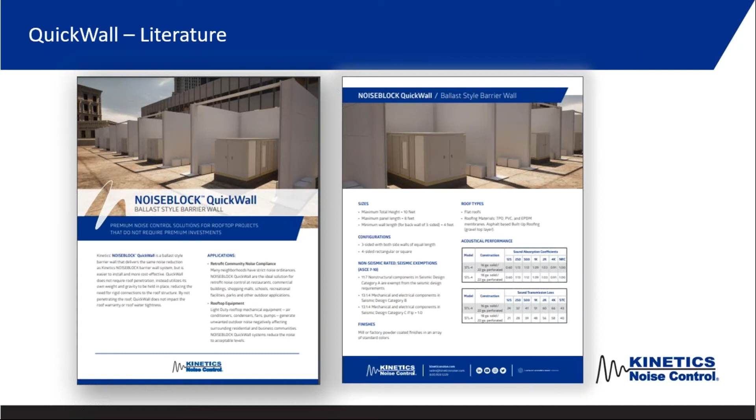Now that we're in the mood to talk about this product, to let you know before we get started as well, there is a data sheet, a flyer front and back on this product. So everything we cover in this presentation is going to be covered or reflected on this data sheet. Whether it's the application, the features and benefits, dealing with the sizes, different configurations, seismic, finishes, rooftop types, and acoustic performance. It's all here. So we'll cover it in the presentation, but also you can download this from our website.

So these are some screenshots from the video, some renderings of a project that we have planned to do. And you'll see there's a number of three-sided noise block barrier wall systems around some rooftop equipment, air handlers, light duty equipment. And there's some windows in the back here in an office building. So they're worried about the noise projecting from these units to that office building.

Now, we can do both three-sided systems or four-sided barrier wall systems. We're showing a three-sided here just so you can see what's going on inside, okay? We open up this wall here so you can see what's going on. So it is available in four-walled systems or three-walled systems.

You'll see here the common components of a noise block barrier wall system. You have your base plate plus column welded assembly. You have your 4-inch thick noise block wall panels, usually perforated inner shell for sound absorption and solid outer shell for sound blocking. So you get that composite noise reduction offered by the absorption and sound blocking. The only thing different here is you're going to see something low at the bottom, these little boxes. And that's where we talk about the ballast of a system.

So just looking at the QuickWall ballast, well, what is a ballast? A ballast is basically a heavy material placed low on a subject matter to improve its stability. And that's what we're doing here. As we said, you have your noise block panels, your structural steel. This is an example of a three-sided system, of course. And then you have your ballasts down here, which are basically weights.

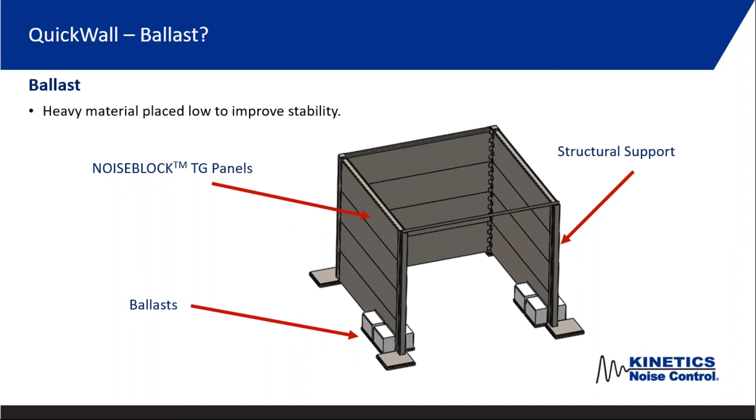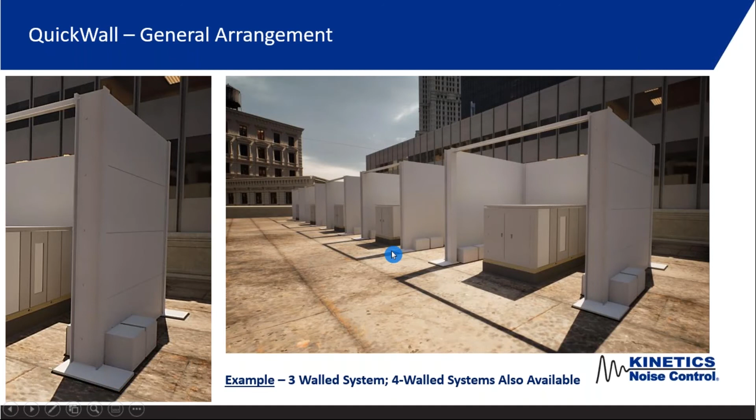We're going to determine how much forces are there, how we have to overcome those forces, how many weights we need, and what is really feasible to be taken up, because this is also going to be weight on the roof. But the key here is, going to the previous slide, is that if you look here, there's no anchor bolts. So this is not rigidly attached to the roof structure. And that's the key here and what's going to reduce the costs.

When I talk about applications for this product, this QuickWall product, I put in the right corner here, retrofit and new construction. The initial benefit is in retrofit applications, where there is equipment up on a roof. There's no problem, it's new construction. A year later, maybe somebody moves in next door and now there's a noise issue at the property line and we have to quiet this down. So just keep that in your mind from a retrofit perspective.

A lot of this presentation, some of the comments, features, and benefits are going to be a function of being retrofit. Also, we can use it for new construction though. And once again, this is all for community noise compliance, rooftop systems, where it could be a restaurant, commercial buildings, schools, worship centers, anywhere where there could be an outdoor noise issue, and also for rooftop equipment, air conditioners, condensers, fans, pumps, anything making noise.

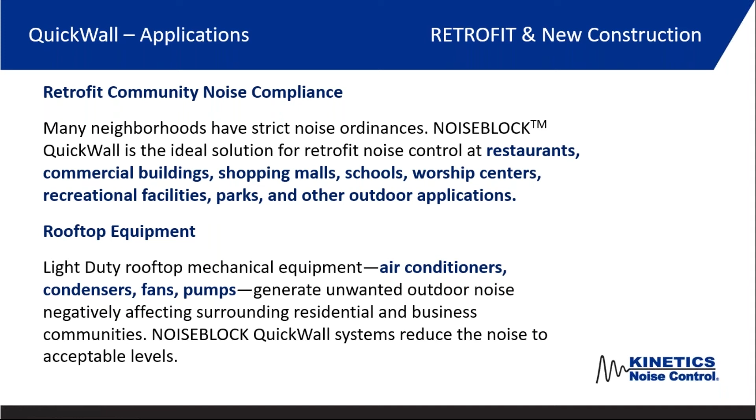So why is there... Hey John, we have a couple of questions. Oh, I'm sorry. Great. Yeah, we didn't mention about questions at the end. So let's go ahead and answer them as we go.

That's great. Okay, so the first question is, can we do one-sided or two-sided wall systems? Right now, we're doing three-sided and four-sided wall systems. We are looking at one and two-sided wall systems, and they should be able to be done. But right now, most of them have been three or four-sided. So I'd say the answer is yes, but we would want to look at the application.

Now, why is not rigidly connecting this to the roof a benefit? Well, one reason is, remember we were talking about retrofit. Maybe the equipment is already there, and we have a noise issue. We have an existing roof. We're going to eliminate the need for roof penetrations using this system. So now we don't have to worry about any water leakages in the future. We don't have to worry about having to get under the existing roof to access it if we have to rigidly tie a column into the system. So those are all very important benefits of this.

The other thing is it's not going to void a roof warranty. It's not going to interfere with the roof warranty. There's also shorter permitting processes when compared to systems rigidly attached to a roof structure. There's quicker installation. And although we want all contractors to be very busy all the time, this actually would reduce the need for multiple contractors.

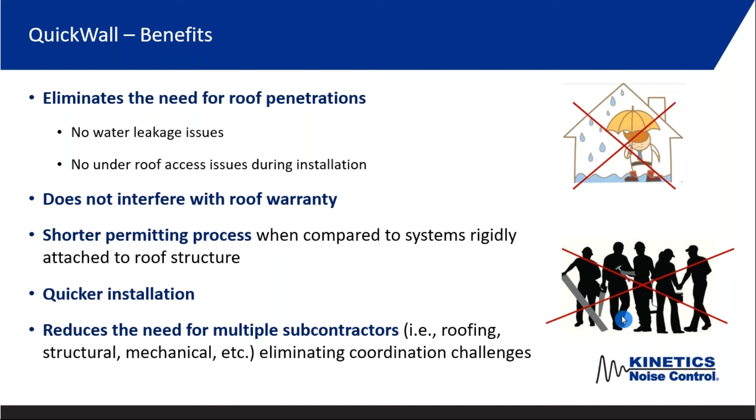If you don't have to penetrate the roof, we don't need a roofing contractor. If you don't need to rigidly tie to the existing roof structure, we don't need a structural contractor. We might only need a mechanical contractor. So now we're eliminating all these coordination challenges as well. So those are some very upfront benefits to this system, which basically floats on the roof. It's not rigidly connected.

QuickWall cost impacts. The initial cost is about the same as our standard noise block system. Our noise block system, with structural steel base plate upward, you have our panels, you may have doors, you may have acoustic louvers. There's a lot of things that can be installed in this as well. That holds true at the same price. There's a little added cost due to the price of the ballast, because we're going to have to add these counterweights, these ballasts, to the system.

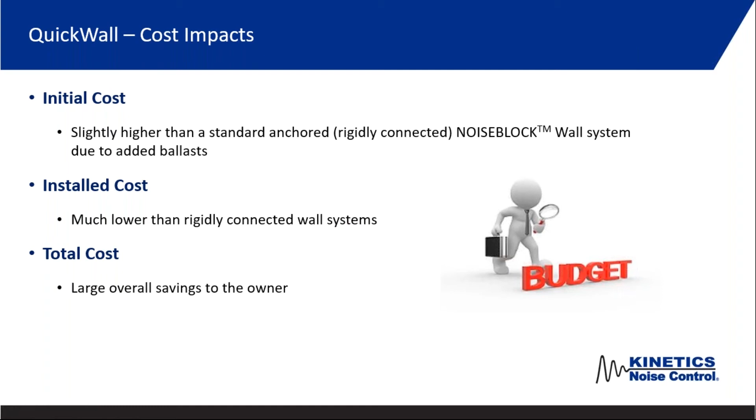So the initial cost might be slightly higher, but the installed costs are much lower than a rigidly connected system, because we don't have to penetrate the roof, we don't need multiple contractors, and we don't need to tie into the roof structure. So the total cost, when you combine the two, is a large overall savings to the owner, and that's what's really important with this.

Now, is this system applicable for all applications? The easy answer is no, not all applications, but for many it is. When we design this, there's a lot of things that are considered. We want to design it to resist any tipping due to wind and uplift forces, and the lateral movement, skidding across the roof. So we look at how many ballasts are needed, how much weight is needed to counteract those forces as they're designed into the system. The added weight also provides additional friction.

Since there's no rigid support at the base plate, we also have a pad underneath that base plate as well. That's to protect the roof, and also keep these datum points, the heights of the ballast and the bottom of the base plates, at the same elevation.

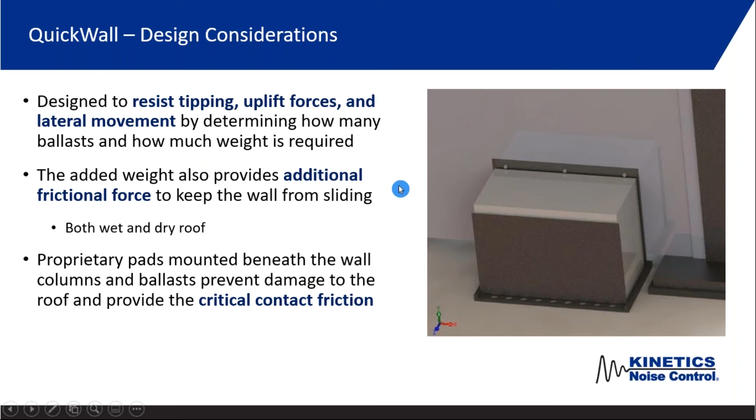But what we do is we counteract those forces. The pads are proprietary to give us a critical contact friction. And the other thing is that this is good for both wet and dry roof systems. So these are things we look at, because those are tests we have run in-house, so that we have that all taken care of.

Would Kinetics provide all the components of the system, including structural steel and engineering? Yes, and that'll be in a deliverable slide that we have at the end, but correct. Kinetics would design everything from base plate upward, including the ballasts and the proprietary friction pads, whether this is powder coated or not, all the bolts, nuts, washers to hold the panels in place to the structural steel.

So everything is connected together in one complete package, almost like an erector set. And that's the nice thing of this. There's no field welding, nothing like that. Anything else? Would the weight of these ballasts introduce the need for modification to existing roof structure to handle the additional load?

Yes, actually, you're going to find a point of diminishing return. In other words, if you have, let's say, a huge wind force, say 200-mile-per-hour gusts of wind, and we say, well, we can counterbalance anything. Well, before you know it, you get too many ballasts, too much vertical weight, dead load, and now your existing roof can't take that load anyway. So that goes back to what I had mentioned. It's not applicable for all systems, for all applications.

But in some applications where it's reasonable and we have enough ballast, there will be some building structures where you might have to add some more structure to the building itself, separate of our system, just to hold the vertical weight of this. And we'll cover that in another slide as well.

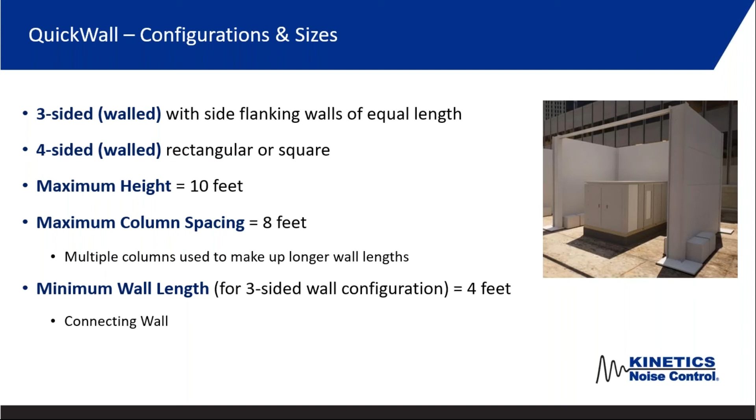And as you have an application, whether Kinetics independent reps are working with engineers, architects, or owners, this will come back into the house here at Kinetics, and our structural engineers on staff will look at this to make sure it's applicable for your application and the site conditions.

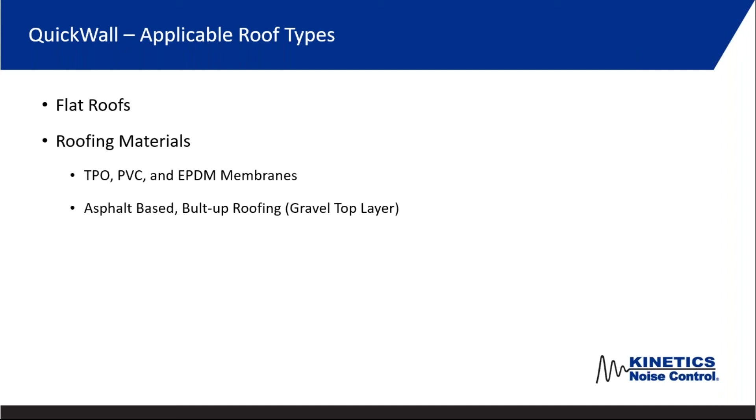Roofing material, all kinds of single membranes, whether it's TPO, PVC, EPDM membranes, no problem. And I think the biggest question that we get is, what about a built-up roof system with a gravel top layer? No problem. We have that covered as well. So this goes with the limitations. They're not necessarily limitations. I think this should be limitations and clarifications.

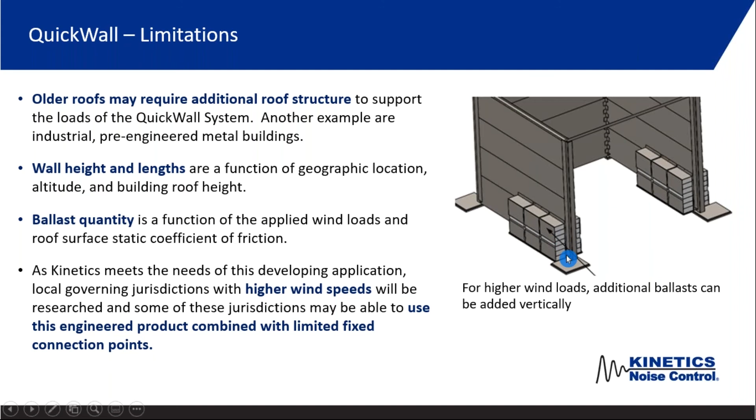They can vary in shape and size, and that's what we can do to see what is the best. How can we keep the lowest profile with these ballasts versus having to go two tier? So the best thing is that it's a composite material. It comes in various sizes, and we can alter the size of the ballast itself.

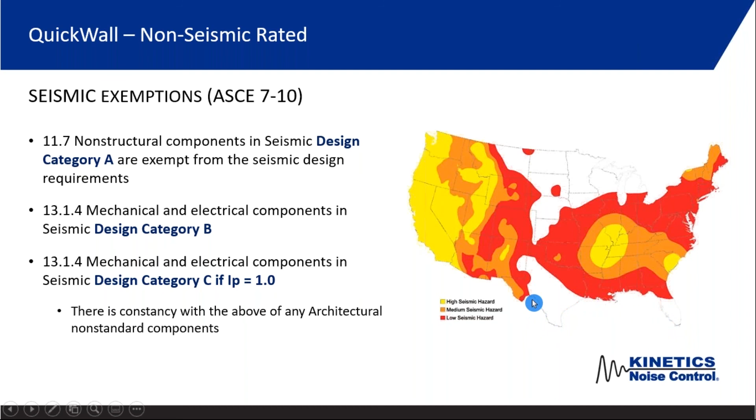You can also look at it in areas that aren't even classified, such as the white areas here in Texas and in Florida. But once again, coastally, we might have to introduce a combination of rigid support and this ballast type.

Okay, so what is provided? This gets back into the question that came up early on in the presentation. Just like the Kinetics noise block barrier wall systems rigidly connected to buildings that people are used to, you get the structural support steel, the design and supply. We do all the fabrication at our Kinetics facilities, and we do all the structural design here with Kinetics internal structural engineering staff.

You need PE stamped structural calculations by a structural engineer when required per locally adopted IBC. So we also can do structural calculations. We can also have a mechanical engineer stamp it if that's applicable for an area, but we do have structural engineers on staff to cover this. Piece marked installation drawings: all the panels, all the columns, all the ballasts, everything comes piece marked with bills of material and on the assembly installation drawings. We also call those record drawings for file.

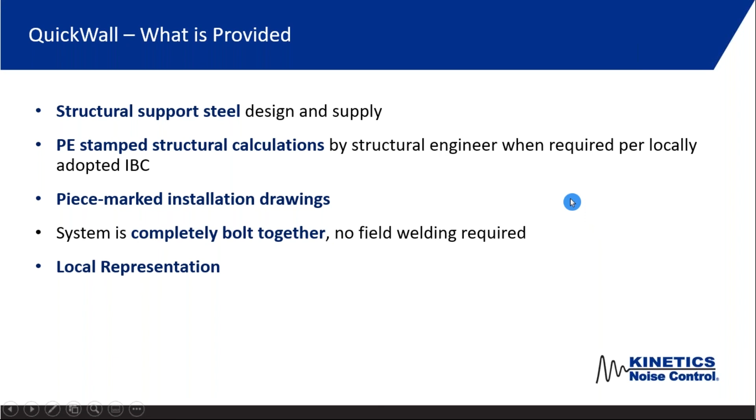Systems completely bolt together, no field welding. All the holes are pre-drilled in the factory. All the nuts, washers, and bolts are included for the panel to column connections and structural connections. All the friction pads are in there and everything. And then we have our local representation with Kinetics, which is really nice. We have people that can come out to the field. They can go over installation with you. They can come walk the site. All that is available.

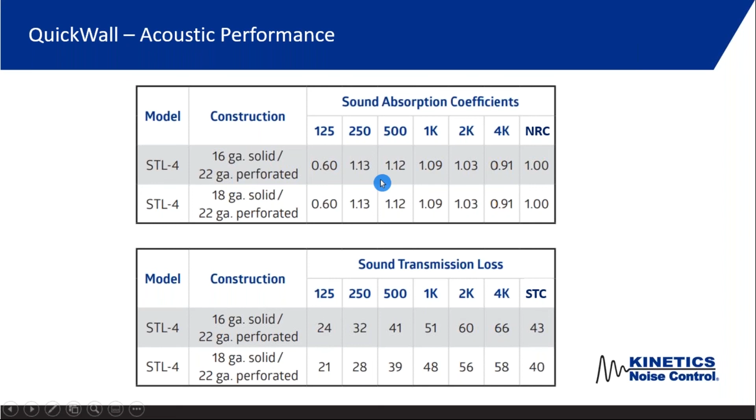The acoustical performance of this system is the same as a standard noise block barrier wall system. All of our products are independently tested per applicable ASTM standards, ASTM C423 for sound absorption and ASTM E90 for transmission loss. Often you're going to see these with a 16 gauge solid and 22 gauge perforated inner shell, or 18 gauge solid with a 22 gauge perforated inner shell. We have all these available, and we can do solid too. We like to use a perforated inner shell because it helps reduce the noise levels before they can even impinge on the solid surface.

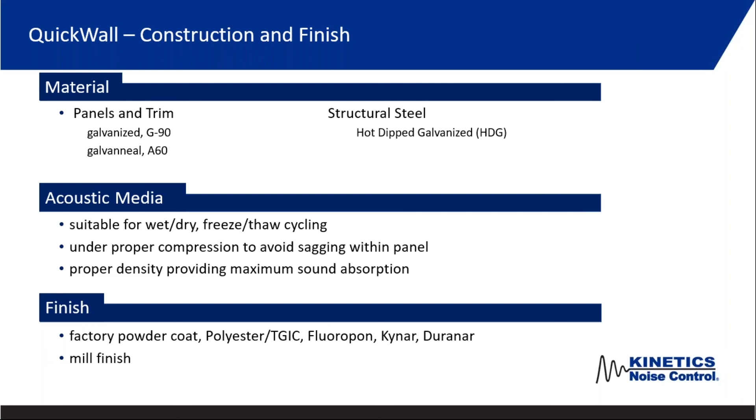So what are the benefits again of the system? It's not rigidly connected to the roof, so no water leakage, no roof warranty issues. That's a huge cost savings to the owner and the engineer. Often this is going to be a retrofit application, but you can use it for new construction as well. Is it applicable for all applications? No, but there are a lot of applications it is applicable for.

So with that, I really don't have any more. I'm just happy that you're hearing about this product. It was a big need we had from the field for the last number of years, and we've come up with a product, as Kinetics does with all our new product development.